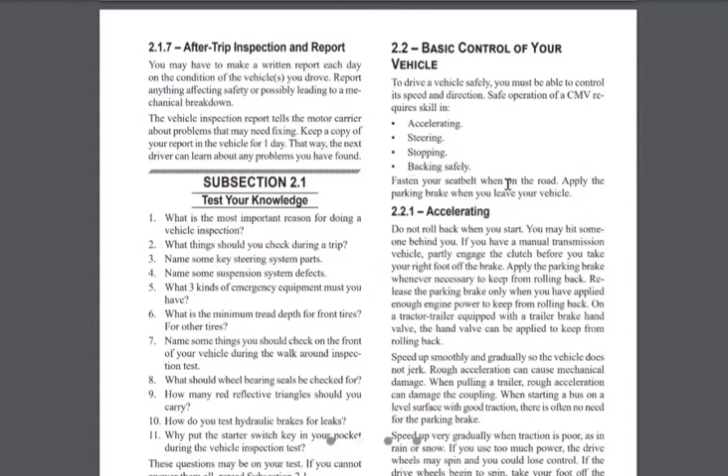So the basic control of your vehicle is what? The way you accelerate it, the way you steer it, stop it, and back it safely. Everybody got that? The list: accelerate, steer, stop, and back it safely.

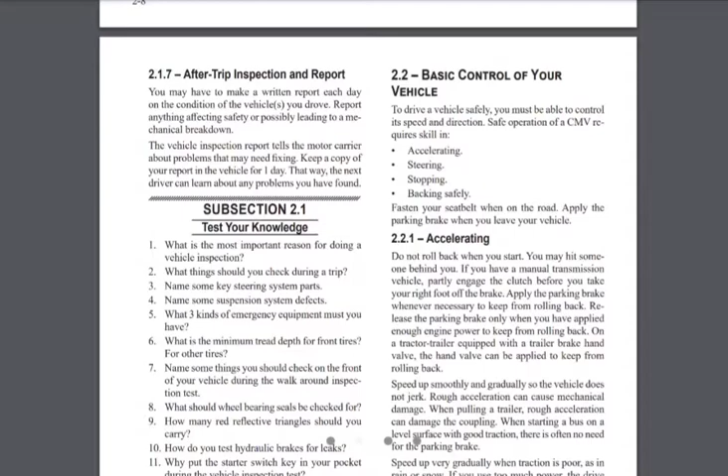All right, backing safely. When we're backing the truck up, we should always start in the proper position, look at the path we plan on going, use the mirrors on both sides of the truck, and back slow. You always want to back slow, because if something goes wrong, you can compensate and fix it. But if you back fast and something goes wrong, you're not going to be able to fix it in time. You're going to tear up something.

All right, back and turn toward the driver's side whenever possible. That means you always want to back in a position where you can look out of your driver's side window and see where you're going, where the back of your trailer is, and where you're about to back it to. That's called sight side backing.

And use a helper whenever possible. Meaning if you can get somebody to get out and see your blind spots, the areas you can't see, that will help you out. Two hand signals that you and your helper should have are when to stop and when to go. If y'all don't agree on any other hand signs, those two hand signs y'all need to agree on: when to stop and when to go.

Shifting gears, manual transmissions, we double clutch. If you ever drove a manual transmission in a car, you used to smash in the clutch once and come out of gear straight to the gear you're going to. With a truck, we double clutch, meaning we clutch once to go to neutral, get off the clutch, then get back on it to go into the gear.

So to shift gears, we have to smash the clutch twice to go into gear, unless you've been driving for a while and know how to float. But until you learn how to float, at the DMV the examiner is expecting you to double clutch. We're going to show you how to do that when you come to the yard.

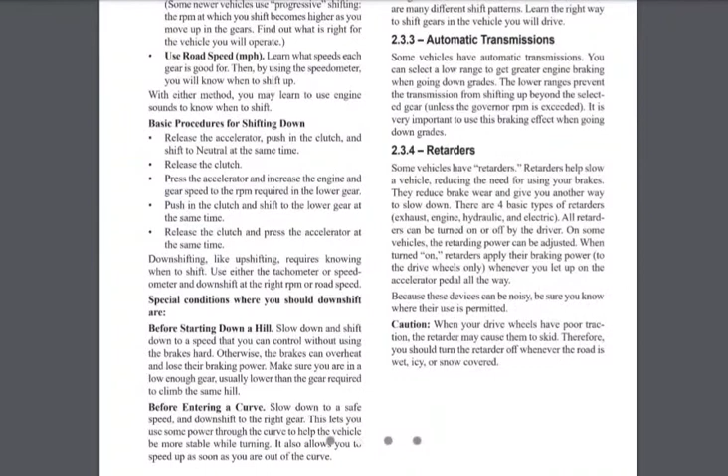Automatic transmission, that's just simple. All you got to do is put it in drive and take off, reverse and back up. Just like a car.

Retarders are engine brakes. It can be electric, exhaust, whatever it's using to slow you down. It's the engine slowing the truck down. So when you come off the throttle, let go of the accelerator, the jake brake or retarder kicks in and starts slowing the truck down.

We use that in a low gear when going down a mountain or a steep hill. So if we're going to come down the hill, you got to first go up it, the mountain, whatever it is. You can't come down a mountain you never climbed.

As you're going up the mountain at 80,000 pounds, you're heavy. You're going to have to keep downshifting to get enough power to make it up that mountain, especially if you're heavy. Say you got a 10-speed truck and you're in 10th gear starting up a mountain - you ain't going to make it up in 10th gear. You're going to have to downshift to 9, maybe 8. You might have to keep downshifting all the way to 5th gear to get enough power to pull that heavy load up the mountain.

Once you get to the top of the mountain, the federal government says we need to downshift one gear lower than it took to climb it. So if I had to downshift to 5th to get up to the top, once I get there I need to downshift to 4th gear before I go down the other side and use that engine brake or retarder.

So that low gear I downshifted to, and that engine brake, is helping me slow down when going down the mountain. That way, all I have to do is smash the service brake - the brake on the floor you smash with your foot. We call that the service brake. Every time you smash that service brake sporadically, it gives it time to cool.

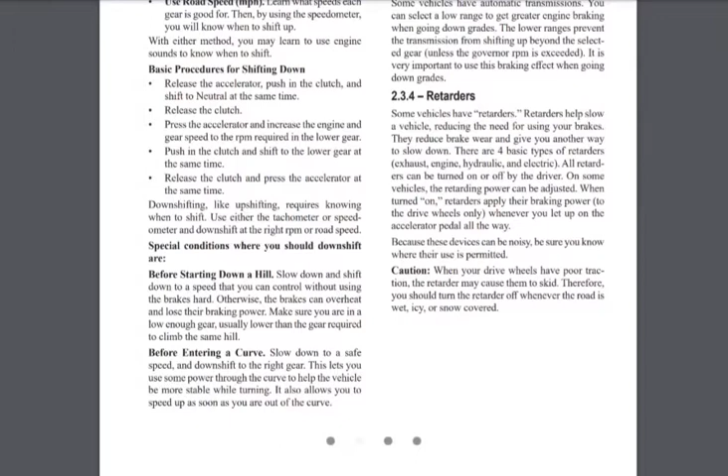So that's what a retarder is for. It stops us from burning our brakes out by riding them going down steep hills.

All right, let's see if y'all been listening. Why should you back toward the driver's side? Now, if you see some of these questions on here that's the same as the ones on your paper, if I were you, I'd write in the answer as we go over it. All right, why should you back toward the driver's side? Anybody know? But I don't think I got that part, to be honest. So you see what you're doing?

Yes, so you can see where you're going. But I mean, we just went over these answers, so you still should know the answer. I don't care about you having the paper or not, you still should know it. So if you know it, when you do find the paper, you know the answer, right?

Number two, if stopped on a hill, how can you start moving without rolling back? So that means if you stopped at a red light or a stop sign, but it's on a hill, how can you go forward without rolling back and crushing the car that's on your bumper?

What, you hold the brake until the clutch engages, right? So you hold the brake until the clutch engages. As soon as you feel the clutch engage, you let go of the brake, and then the truck will start pulling forward. You hold the service brake though, right? Service brake, not emergency brake, right?

You can use either, your foot's on the pedal. I don't know why in the book it tells them to do the emergency brake, but in real life you only use the service brake, right? You use the service brake. You keep your foot on the service brake, start coming off the clutch slowly till you feel that truck pulling like it wants to go forward.

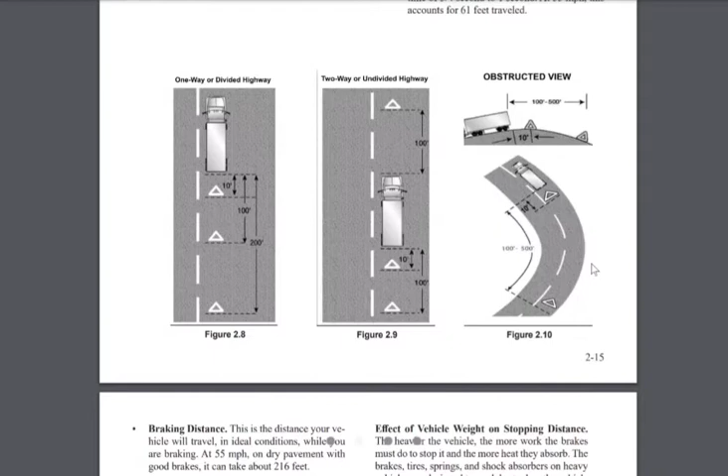And the 500 feet one is the most important, because it's warning the people in the blind spot who don't see you yet. You must give ample warning that there's a stalled vehicle in that lane. If you don't give them ample warning and they come flying around this curve or this hill and end up going under your trailer and decapitating themselves, you're going to jail for vehicular homicide because you did not give ample warning that you were stalled in that lane. So that 500 feet triangle is the most important, because this is a blind spot. They don't know you're there. Everybody got that? Yes. All right.

This diagram was just showing you what I was telling you earlier, that it takes the length of a football field to come to a complete stop.

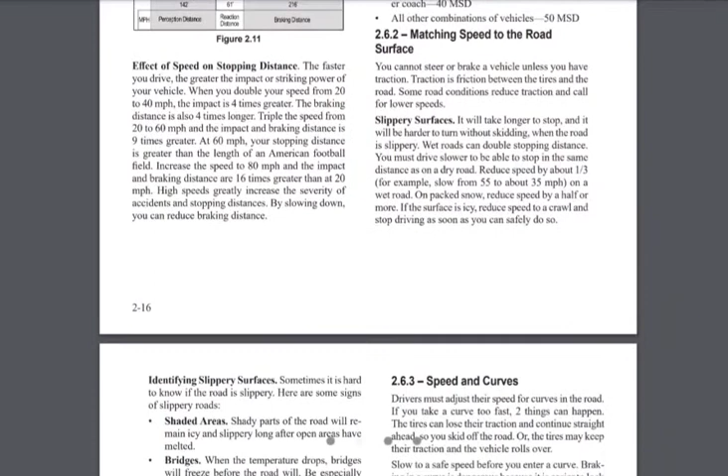All right, slippery surface. It takes longer to stop, and it will be harder to turn without skidding when the road is slippery. Wet roads can double the stopping distance. You must drive slower to be able to stop in the same distance as you would on dry ground. Reduce your speed by 1/3, for example, slow from 55 to about 35 when it's wet outside. So they want you to drop your speed by 1/3 when the weather is bad, because your stopping distance is going to increase even more now because it's wet, snow, or whatever the conditions may be.

Everybody understand that? Yes. Speed on curves. For example, if you're on a freeway and your exit is coming up, and the sign says this exit ramp's speed is 35 miles an hour. Well, if that's saying a little Corvette needs to slow down to 35 miles an hour to make this exit ramp, how much more should you?

Most commercial trucks sit at 13 feet, 6 inches high. So if a little Corvette that ain't probably sitting 2 to 3 feet off the ground, and it's saying that little 3.5, 4 foot car needs to slow down to 35, you're at a higher risk of rollover because you're sitting high. You got a higher center of gravity, so you would tilt over and roll over. Rollover is the number one cause of truck drivers' deaths and accidents.

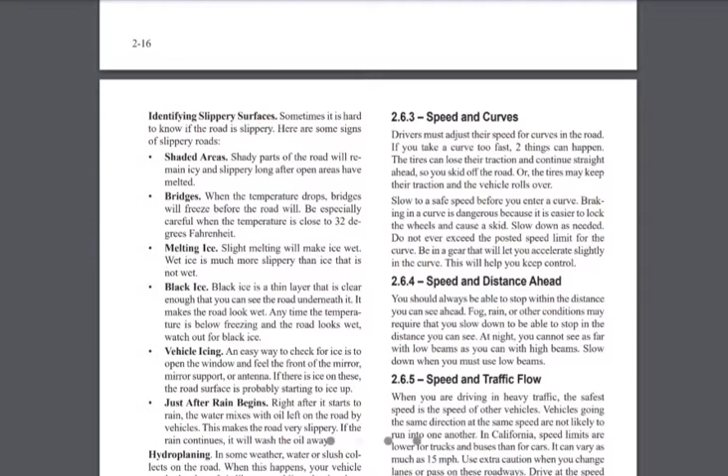Rollovers happen from taking curves and turns too fast, right? So slow down on curves. If it says 35, I'm doing 25. I'm dropping my truck 10 miles below what's posted on a sharp curve. Everybody got that? Yes. All right.

All right, pay attention to this. You're going to see 2 things on this list that you may see on your permit test. Know what black ice is and know what hydroplaning is. Black ice is a thin layer of clear ice. That's what makes it dangerous, because the ice is so clear you can't see it on the ground. Not until you hit it and you start sliding all over the place. That's called black ice. They ain't talking about the air freshener for your car, they're talking about literal black ice.

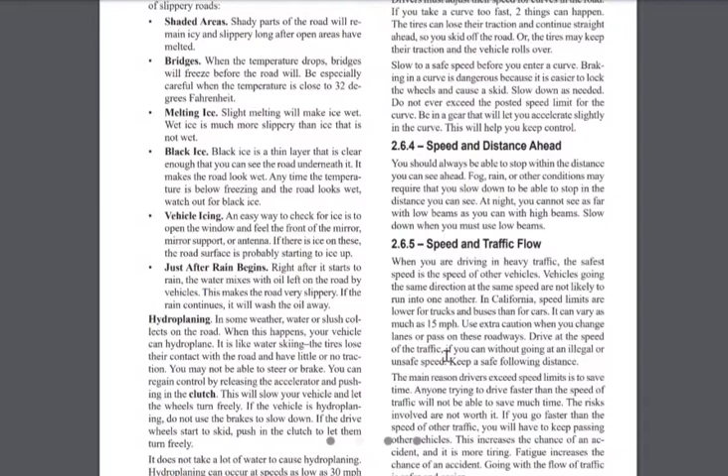All right, and then hydroplaning. Hydroplaning is when water comes between the traction of your tires and the ground, and that can cause your trailer to jackknife. Hydroplaning is one of the number one causes of trailers jackknifing. Drivers driving too fast in the rain with an empty trailer, and that trailer starts swinging around and coming around on them like a jackknife, closing in on them. So slow down in the rain.

See if y'all listening. How far ahead does the handbook say we should look? 12 to 15 seconds. Correcto. Number 2, what are 2 main things to look for ahead? Merging and turning traffic. That's it.

All right, number 3, what's your most important way to see the sides and the rear of your vehicle? Remember I said if they adjust it right? Your side mirrors. That is correct. Your mirrors are your best friend.

Number 4, what does communicating mean in safe driving? We talked about that. Signaling your turn, brake intentions, lights. Signaling your intentions. That is correct. Signaling your intentions is communicating.

Number 5, where should your reflectors be placed when stopped on a divided highway? 10, 100, 200 feet. Where, in front or back? Behind, in the rear. That's right. So they all go in the back: 10, 100, and 200. All right, let's go.

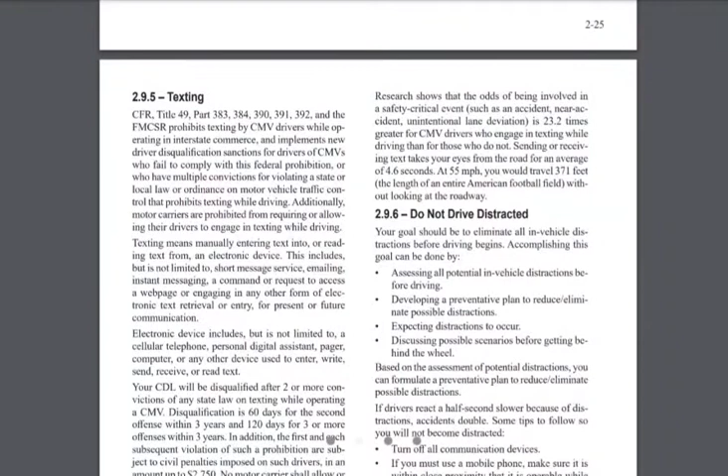A lot of these companies now have cameras in these trucks, front and back outward facing cameras, so they can see - they can look at you dead in your face if you're on your phone texting, they're looking dead at you.

Of course, we can't be texting while we're driving. The same rules that apply to your car apply for trucks.

Aggressive driving and road rage - you need to know the difference between the two, and yes, there is a difference. An aggressive driver is the act of operating a motor vehicle in a selfish, bold, pushy manner without regard to the rights and safety of others. That's the rude person cutting you off, giving you the middle finger, jumping from lane to lane, impatient. Apparently wherever they're going is more important than everybody else in the world. Their business is top notch, yours ain't. That's the aggressive driver - just get out my way, I got where I'm going is more important.

Now road rage, on the other hand, is something totally different. Road rage is when a person wants to do physical harm to you or to your vehicle. They want to put them paws on you, all right, because you done pissed them off that bad. That's road rage. So know the difference between aggressive driver and road rage.

Night driving - you got to be careful with night driving because of night glare. Glare can blind you. And now since LED lights came out, everybody wants LED lights for headlights, and sometimes them LED lights be too bright and it blinds you, you can't see. Remember we talked about looking 12 to 15 seconds down the road? Well, you can't do that at night because you can only see as far as your headlights will show you. So that means you should never drive any faster than you're able to stop within the range of your headlights.

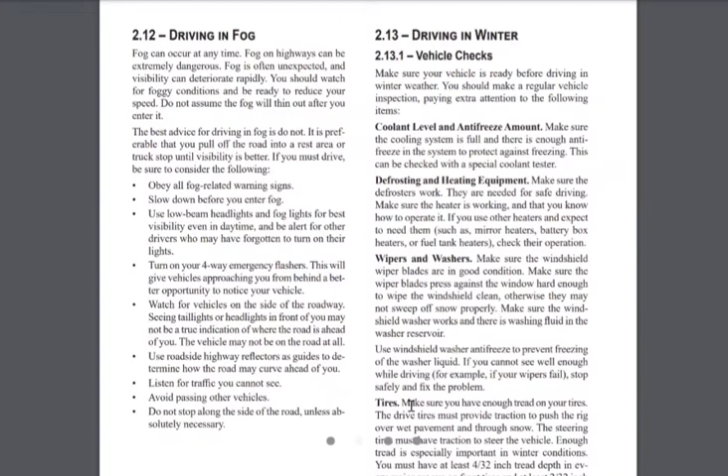For your front axle tires, the least tread depth they can go is 4/32 inch. That's the lowest they can go. All the rest of your tires, on the back of your truck and on your trailer, the lowest they can go is 2/32 inch. So your very front axle is the only axle where the lowest it can be is 4/32 inch. All the rest of your axles, all the way to the back of your trailer, the lowest they can go is 2/32 inch. Everybody got that?

Some states require tire chains. Me personally, I never use tire chains. I always use the requirement for tire chains as my indicator to let me know I'm done for the day. So if I was driving in snow and it got to the point where they stopped putting up signs about chains and started requiring them, that's when I was looking for a rest area or truck stop to stop, because I'm done for the day. If I have to put chains on my tires, that tells me I shouldn't be driving because something isn't right. So that was always my indicator. I never put chains on my tires because I always stopped driving before they were needed. I was done for the day.

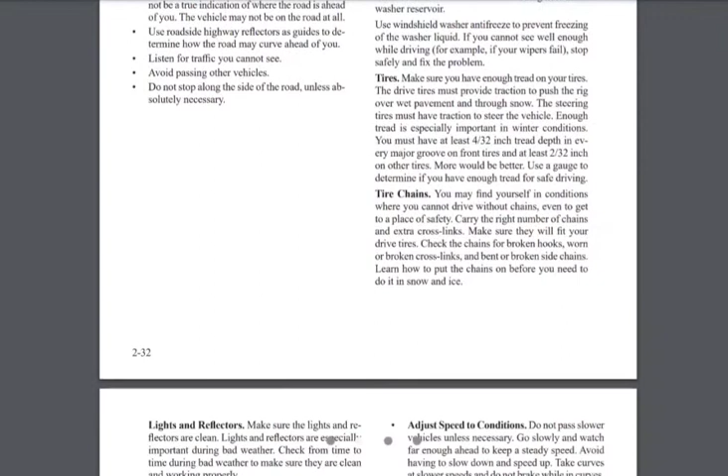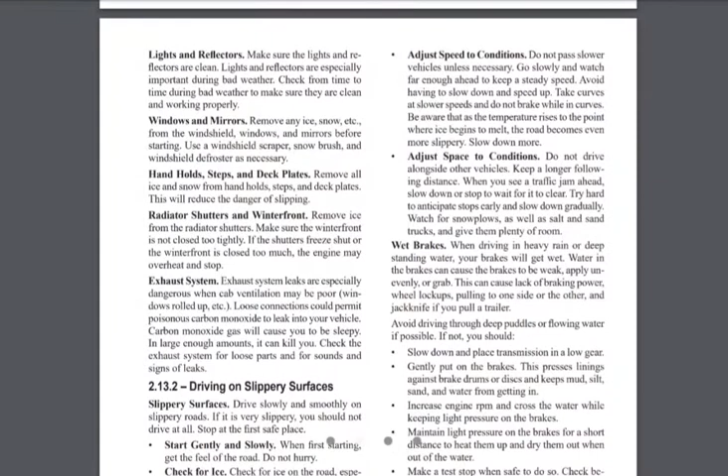But some people like to drive and take those risks. Me being on a mountain in the snow, that's not a good combination. You start sliding down the other side of the mountain, and when that truck starts sliding, you won't be able to control it. Trust and believe, I'm done driving for the day.

Wet brakes. This isn't just about driving in heavy rain, it's about going through standing still water. When you drive through deep puddles, that water can accumulate oil, grease, and debris. The federal government says we should apply our brakes gently enough to push the pad lining against the drum. That keeps the oil, grease, and debris rolling through the puddle from getting between the drum and the lining. If it gets in there and I apply my brakes later, they can stick on one side and pull my truck in one direction, or not have enough friction because of the oil, and I could end up rear-ending somebody or skidding into an intersection. So to prevent that, we apply our brakes gently whenever we drive through standing still water.

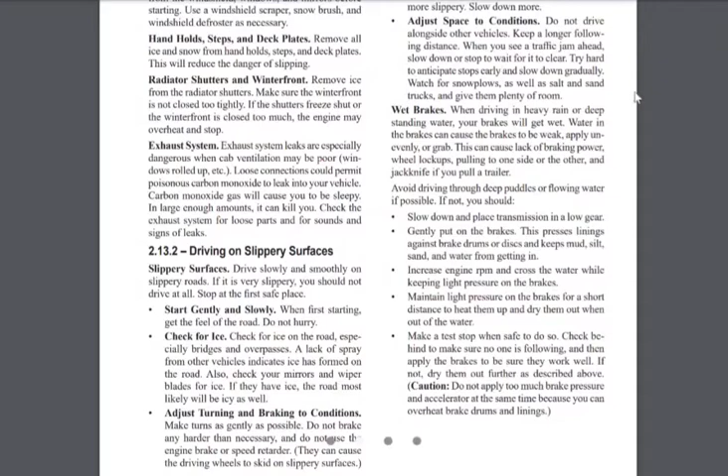Everybody got that? Hot weather driving. If you're driving in extremely hot weather, it's similar to driving in winter weather. Heat causes air to expand, so a lot of people think because the air in their tire is going to expand, they should let some air out. The answer is no. We never let air out of our tires, because once that tire cools down, you're going to be underinflated.

So instead of letting air out, the federal government says every 2 hours or every 100 miles, we need to pull over and check our tires. That's only in extreme hot weather, I'd say like 95 degrees or higher. You need to pull over every 2 hours or every 100 miles to check your tires.

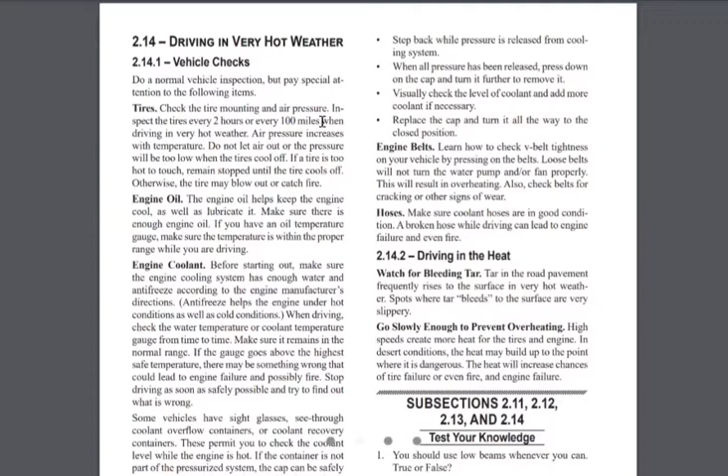Because trust me, believe it or not, tires will catch fire in real hot weather. If the pavement is hot, the tire is hot, and the sun is hot, you'll see flames just bust out of nowhere on your tire. A fire extinguisher can't put out a tire fire. You'll think you put the fire out on one side, and it'll pop out on the other side. You spray that side, it jumps over there. It'll play hide and go seek with you all day long. That's the worst fire to try to put out, a tire fire, because when you think it's out, it starts right back up. All right, let's move on.

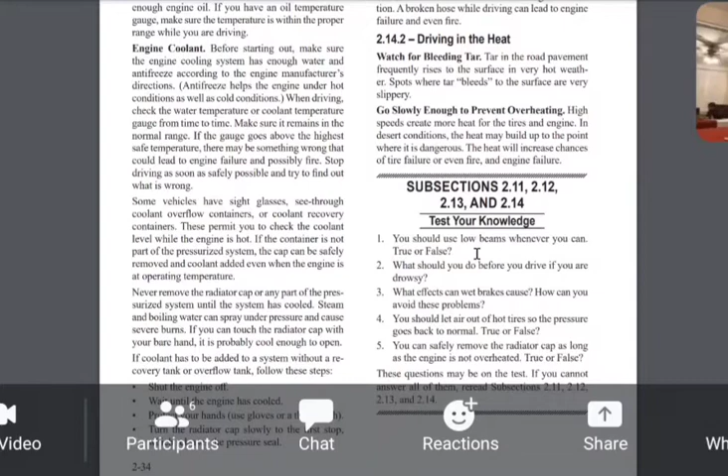You should use your low beams whenever you can, not high beams. True or false? That's true. Look at all the new cars today, they have daytime running lights on them. Remember, I said low beam, not high beam.

Number two, what should you do before you drive if you are drowsy? Y'all better get this right. Get some rest, go to sleep. If you said something else, I'd say log out now, trucking ain't for you.

Number three, what effects can wet brakes cause, and how can you avoid these problems? We just talked about it. Slipping, sliding brakes. So how can we prevent it? Gently braking, lightly pressing the brakes. Gently apply your brakes when you're going through a puddle. That is correct.

Number four, you should let the air out of hot tires so the pressure can go back to normal. True or false? False. That's right, you never let the air out of your tires.

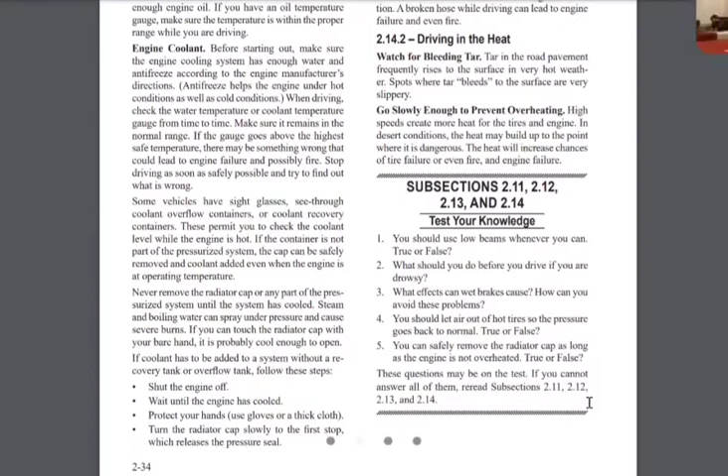You can safely remove a radiator cap as long as the engine is not overheated. True or false? False. You take a hot radiator cap off and see what happens, I bet you won't do it again. That is false. You got to watch these little trick questions, as long as it's not overheated.

Railroad crossing. Only two things you need to know about railroad crossing is this. Number one, know the difference between passive and active. The passive track just has the sign that says railroad, it don't got the flashing light or the gate to block you. The active one is the one with the flashing light and the little gate that comes down so you can't go over the track. So the active has the gate, the passive one don't.

The second thing you need to know about railroad tracks is, remember we talked about high raised railroad tracks. If you got a low ground clearance trailer, you can get stuck on them. So if you get stuck on a railroad track, you need to call 911 as soon as possible so they can get a hold to that train yard and try to get that train to stop before it gets to you, so they can get you safely off that track. And get out of the truck too, right? Yeah, make that call away from the truck.

So passive has no lights, that's basically what we need to know. You said passive has no lights? Yes, it just got a sign that says railroad crossing, it don't have no flashing light or no gate. Okay, the active one does.

We already talked about mountain driving, how you should downshift one gear lower before you go downhill and use the engine brake. The reason we do that is because of brake fade and brake failure. You're going to see a question on your permit test asking what two things can cause brake fade and brake failure. The answer is overheating, getting your brakes too hot.

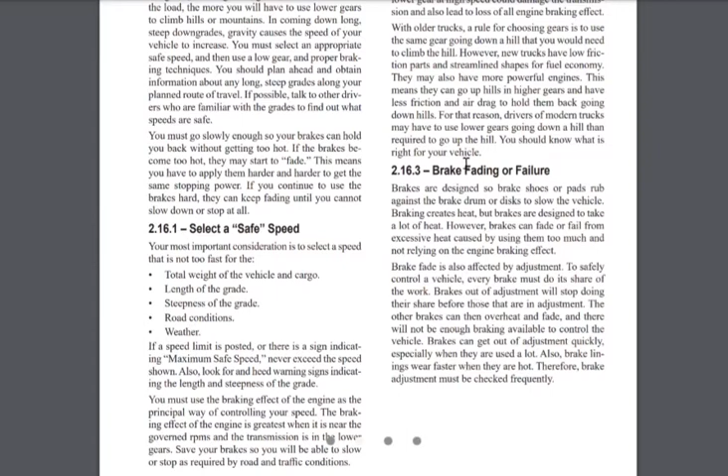The second one is brakes out of adjustment. So when you see this on your permit test, what two things cause brake fading and failure? Brakes overheating and brakes being out of adjustment, that's the answer. They cause brake fading and failure. Everybody got that? Yeah.

All righty, let's keep going. Always keep both hands on the steering wheel. Even on your road test, when that DMV examiner sits in that passenger seat and you're trying to drive that truck with the gangster lean, one hand on the wheel like you're in a Cadillac, you're going to fail. As long as you're driving with one hand, both hands have to be on that steering wheel at all times.

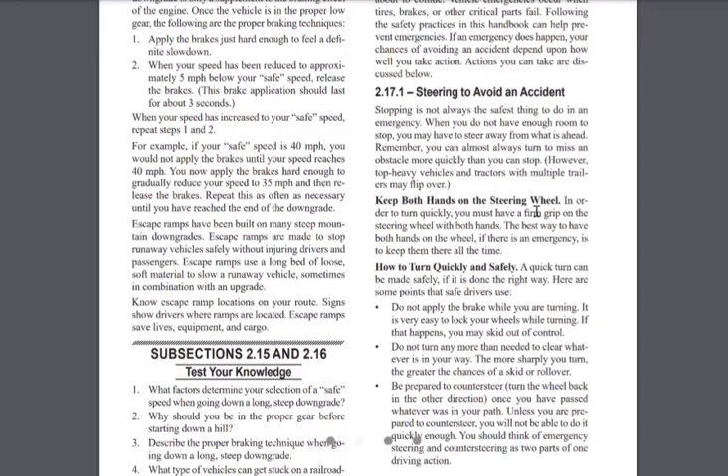The only time you can have one hand on the steering wheel is when you shift. Once you shift gears, you have to go right back to two hands on the wheel, because two hands gives you control in case of an emergency, say somebody runs out in front of your truck. So they want both hands on that wheel at all times, only when shifting can you take one hand off. Everybody got that? What factors determine your selection of a safe speed when going down a steep downgrade?

Going down one gear lower than you were going up. That's true on what you should do. But the question they're asking is, how do you know what gear you need to be in to go down, or what speed you need to be going at to go down a hill?

Have you ever been on top of a mountain and got ready to go down the other side, and you see those little signs with a picture of a truck going downhill, and they say 4%, 5%, 6% - the percentage. So how steep that hill is determines how fast you're going. The steeper it is, the slower you want to go.

Because the more straight of a drop it is, and you're at 80,000 pounds, you want to go down that mountain nice and slow. You ain't trying to fly down a mountain that's real steep when you're heavy, because you ain't gonna be able to get on those brakes and stop that truck. It ain't gonna happen. That's why they want you to slow down. And if they catch you going down the mountain too fast, you're gonna see so many blue lights on you so fast, ready to pull you over, because they know that's a recipe for disaster.

It's like 30 miles per hour coming down the Cajon Pass, right? That's right. And that's what you better do. Why should you be in the proper gear before starting down? We already talked about that.

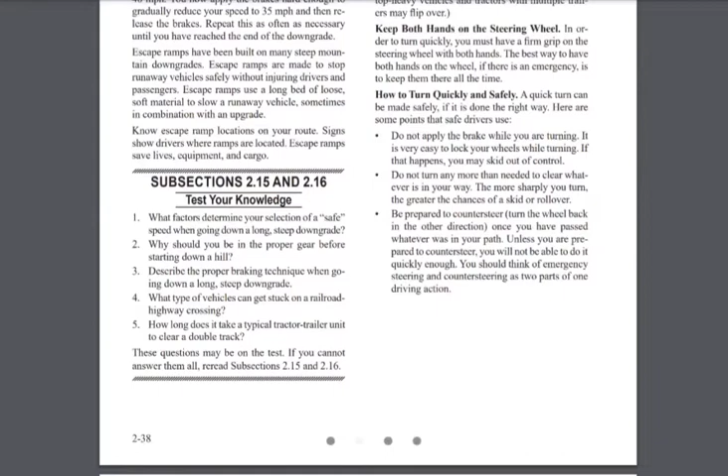This is what we were talking about earlier, control braking and stab braking. We do control braking because we can't do stab braking, because of ABS.

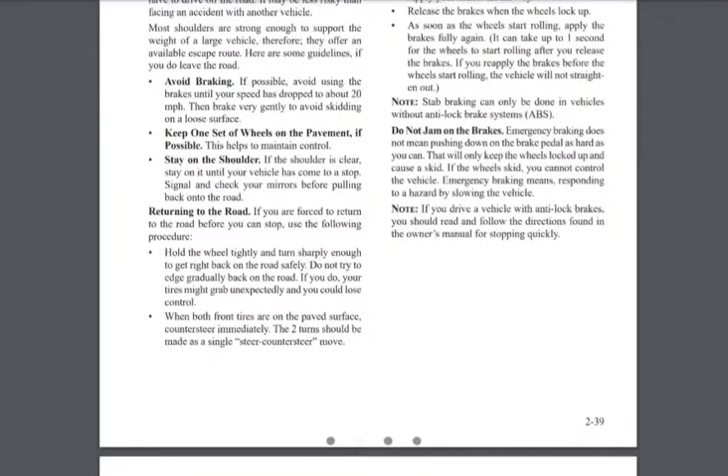The 3 ways to know that we're having tire failure: sound, vibration, and feel. Sound, like the bang from a blowout. Vibration, the steering wheel shaking. And feel, meaning it's hard to turn the steering wheel. All 3 of these are indications that you've got a tire problem, so you need to pull over at a safe spot and check your tires.

How do you know if your truck has ABS? When you turn the ignition on, you should get an ABS light come on your dash. It should blink and go out - that means it's working. If it blinks then stays on, that means your ABS is malfunctioning. Do you still have normal brakes if your ABS malfunctions? Yes. I've driven a truck and trailer cross country before with the ABS light on the whole way like a Christmas tree, but it doesn't matter.

ABS only affects your brakes when you slam on them to lock them up to stop for an emergency. Something runs out in the road, you slam it, you run a risk of locking up your brakes. That's it. Your regular normal brakes still work.

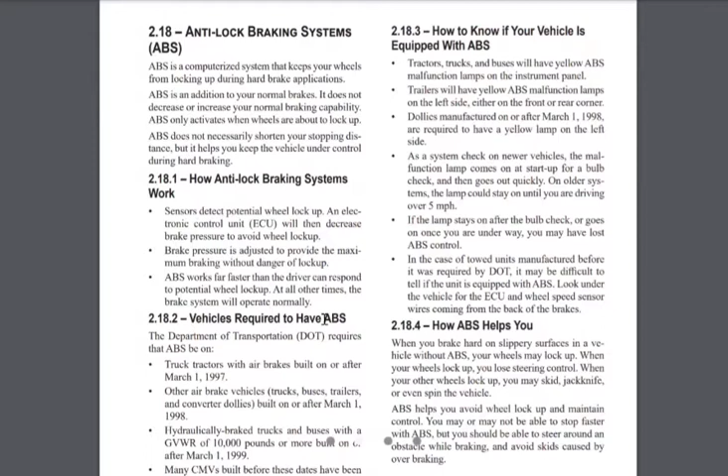You can stop at red lights, stop signs, you can slow down, your brakes work. All right, so everybody understand those key points that you need to know about ABS? Yes.

We're going to talk about ABS again tomorrow on air brakes, and we're going to talk about ABS again on Wednesday on combination. ABS is on all three of them, so you're going to get a lot about ABS anyway.

So these are some of the things that can cause your truck to skid out of control: over braking, over steering, over accelerating, or driving too fast. All these four things contribute to your truck getting out of control.

Look at this diagram. Anytime you see a diagram on your test, pay attention to the word in front of it. So anytime you see jackknife, look at the word in front of it, because it tells you who caused the jackknife. This one says tractor jackknife. On Wednesday, when we do combination, we're going to see another diagram that says trailer jackknife. But this one is a tractor jackknife, meaning the truck caused this jackknife.

If you look at this arrow, it's coming from the drive axles on the truck, and if you read the caption, it says the rear tractor wheels locked up. So when they locked up, they began to slide to the left, which caused the trailer to start swinging around to the right, causing a jackknife. So the truck caused the jackknife because the drive wheels locked up on it. Pay attention to the word in front of jackknife, because that's going to tell you what caused it.

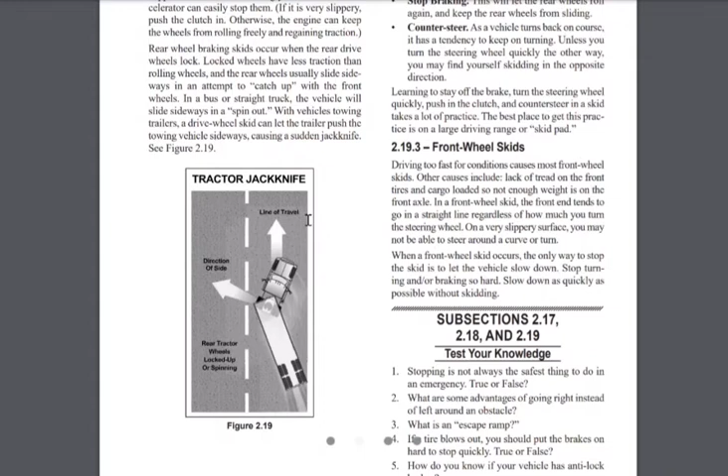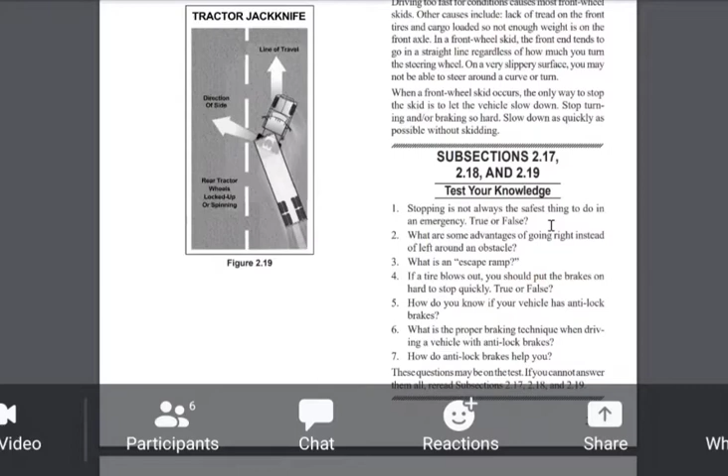Stopping is not always the safest thing to do in an emergency. Is that true or false? That is true. Sometimes whipping onto the shoulder or whipping into the left lane would be far better than locking up your brakes.

Number two, what are some advantages of going to the right instead of the left around an obstacle? What's on your right? Emergency lane, that's right, whip it onto the shoulder. Because if you go to your left, that could be oncoming traffic or other cars in that lane. So sometimes whipping over to the shoulder is safer if there's a shoulder there. Now, sometimes you can be in certain areas where there ain't no shoulder.

Number three, what is an escape ramp? We talked about that before. An emergency ramp to stop your descent if you lose your brakes. It's an escape ramp where trucks that lost their brakes go to come to a stop, and that's what it's for. And you'll get fined for using it improperly - last time I checked it was like $1,500 for that.

Number four, if a tire blows out, you should put on your brakes hard to stop quickly. Is that true or false? False. If you blow a tire out, slamming on your brakes is the last thing you want to do, because all you're going to do is make a bad situation worse.

Number five, how do you know if your vehicle has anti-lock brakes? It has an indicator light. Where? Up on the dash. Right, it's going to be an ABS light that comes on your dash.

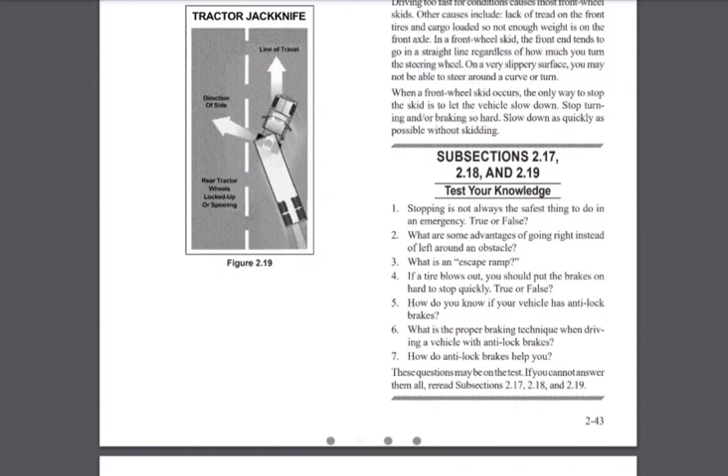Got all kinds of women's stuff out there. Women get excited about the holidays, don't they? Yeah, they do.

Accident procedures. There's a sequential order the highway patrol wants truck drivers to follow if we ever get in an accident. They want you to follow it in this exact order because on your test they're going to mix up the order and you have to find the proper sequence. First, protect the area. Second, notify the authorities. Third, care for the injured—a lot of people think that should be first, but no, it's third. Fourth, collect required information. And last, report the accident. That's the proper sequential order to follow if you get in an accident. Everybody got that?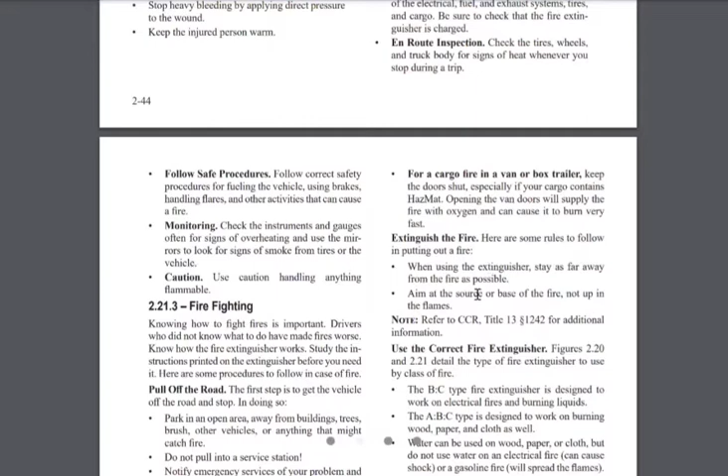Fires. The only thing you need to know about fires for your permit test is how to use an extinguisher. To extinguish the fire, here are the rules to follow: when using the extinguisher, stay as far away from the fire as possible. Number two, aim at the source or base of the fire, not up at the flame, because if you put the base out, the flame will go away. That's how you extinguish a fire. This is the answer they want on the permit test, not your own way of putting out fires like stomping it with your foot. No, this is what they want. Remember, we got to give them what they want so they can give you what you want—your license.

We already talked about alcohol, remember, 0.04. If you have a blood BAC of more than 0.04, you're considered under the influence when you have a commercial license. We can't have drugs in our trucks. We can't even have anything that causes drowsiness—you can't have NyQuil, none of that in a commercial truck. Bet you didn't know that, huh? No alcohol either, not even an unopened bottle. I don't care if the seal isn't even broken, it cannot be in there. So if you find a good deal on some alcohol, find the nearest post office, FedEx, UPS, DHL, or somewhere and ship it home. Don't put it in your truck. Ship it, and it'll be at home for you when you get there, because you'll mess around and lose your job over a bottle of liquor. It ain't even that serious.

Hazardous material. The only two things you need to know on your permit test when it comes to hazardous material—since hazmat is an endorsement, they go deeper into it if you're getting the endorsement, but for your permit you just need to know two things. Number one, can you haul hazardous material without the endorsement? You actually can if it's below a certain weight. For example, say you work for Walmart—they sometimes put bleach and ammonia on their trucks, but you don't need the hazmat endorsement to haul it because there's not enough weight to require placarding. But if it's a hazmat load you're picking up and you don't have the endorsement, you're right, you cannot haul it at all.

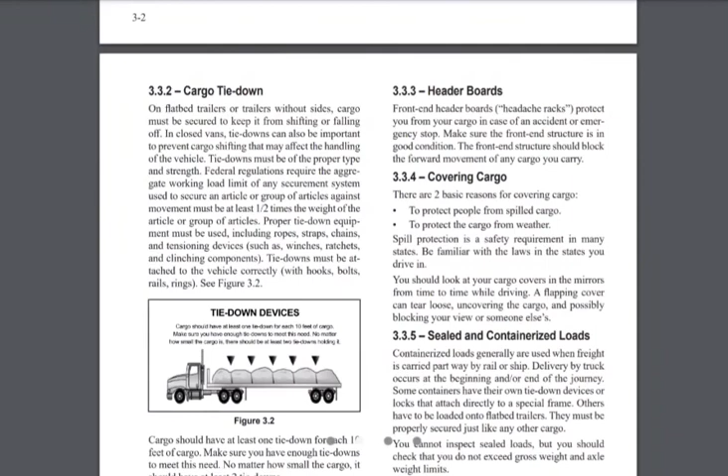All right, cargo tie downs. This is dealing with flatbeds. Anytime you pick up a load that's flatbed, whatever you put on the back of your flatbed, every 10 feet of it must have a strap. 10 feet strap, 10 feet strap, 10 feet strap. All right, that is the law.

Now if you say, well what if I pick up a load that ain't long at all, it's just like one little section here. If it's small, you still have to have a minimum of 2 straps on it, just in case one strap breaks. You got to have a minimum of 2 straps on it. But if it's long, every 10 feet must be strapped. You're going to see that on your permit test.

Header boards is the front of the trailer, is reinforced steel. So if you ever slam on your brakes and all your freight goes flying forward, it prevents that freight from coming inside the truck and crushing you. The header board is there to protect you.

Cargo covering. That means those truck drivers that have those deep beds back there, like dump trucks hauling wood chips, rocks, gravel, all that, you're supposed to have a covering over it. Don't you hate when they don't, and then rocks fly out and crack the windshield on your car and you be mad like, damn. Yeah, so because they need a covering over that. You're supposed to have cargo covering to protect the other cars and people on the road.

All right, sealed containerized loads, that's for ports and the rail yards. This is when you go to the train yards or to San Pedro or Long Beach ports and get those containers off those ships, they set them on chassis. And when they set them on chassis, you as a truck driver got to make sure those containers are properly strapped down to those chassis. Because if they don't, and you turn a corner, those containers can roll off that chassis and fall over on somebody. So you're responsible for that.

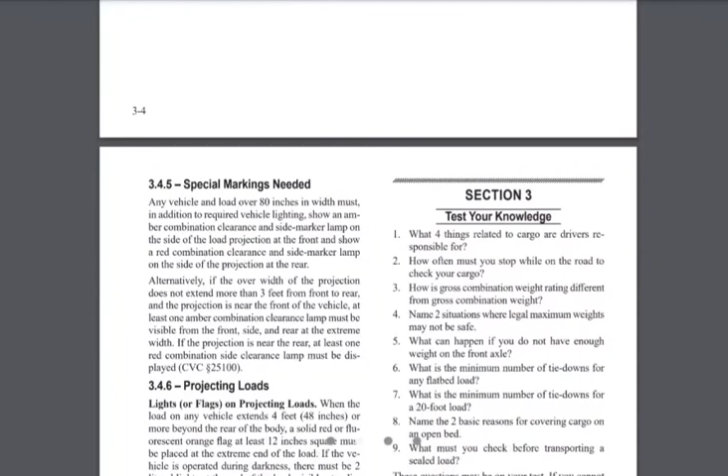What else? Projecting loads. So this is a flatbed. You ever seen those trucks on the road with orange flags sticking on the back of whatever they're hauling? The reason they do that is if you're hauling something on the back of your truck and it sticks out more than 4 feet, you're supposed to put an orange or red flag on it because it's considered a projecting load. So anything that sticks out more than 4 feet past the back of your truck, you need to put an orange flag on it.

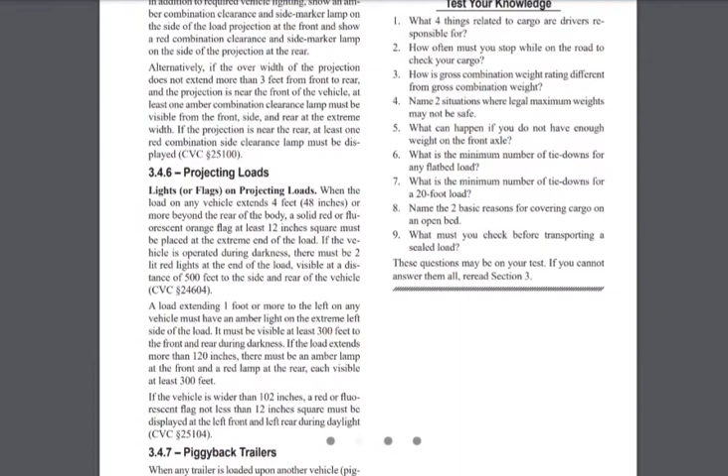And then last but not least, what's this? Piggyback trailers. You see these a lot with what they call hot shot drivers. They have the dually trucks and they pull those trailers, but they be pulling all type of stuff on it - containers and whatever they can pick up to make some money. You got to make sure when you're hauling those type of loads on those type of trailers that your load don't shift, topple over, or become unstable. You got to make sure you properly secure it to your trailer, because if something happens, that's on you.

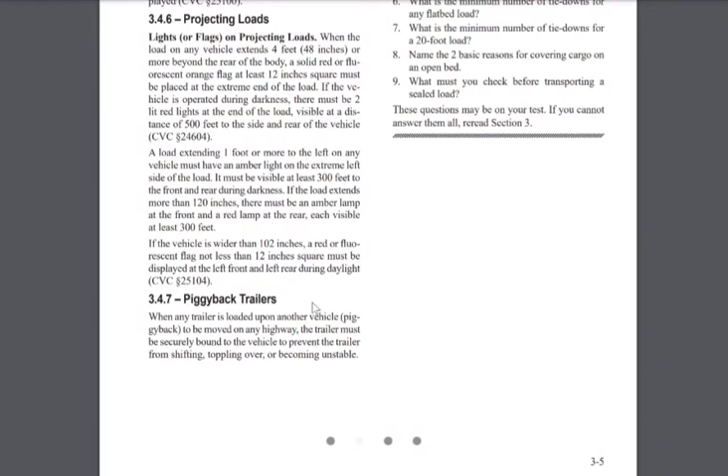Let me see. I think that's it. All right, so that's the end of it.

Any questions about general knowledge that we covered tonight? No, sir. No, not needed.